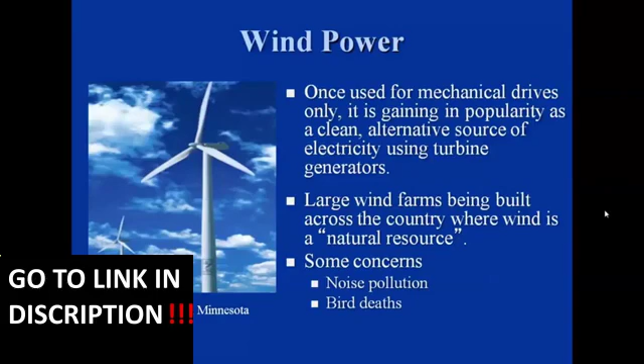Hydropower is basically using water force as energy. Traditionally, it had been used to churn mills. That's why we would have those water mills, and again, they did several things with those from a mechanical energy standpoint. But today we have hydroelectric generators.

We most predominantly have hydroelectric dams, but we also have what are known as tidal powered turbines. These are actually utilizing the current flows, generally in and out of a river or in and out of some type of inlet. They use these in the North Sea off of Scotland. There's an experimental one in the East River in New York City as well.

And again, there are subsurface turbines that actually spin as the current goes in one direction or another, and those drive a generator which produces the electricity.

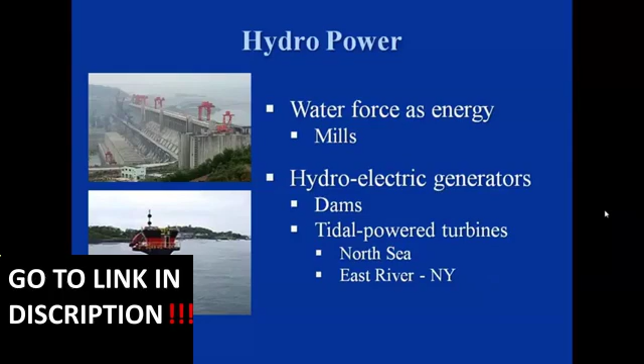Solar energy has been around for quite some time. The interest in it and the expansion of it really began with the oil embargo of 1973 and 1974, and then the second embargo in 1979 caused even more interest in it. The idea is to collect heat and energy from the sun and use it for things such as pure heating, generation of steam for electric turbines, or to actually create electricity directly, which would be the use of photovoltaic cells.

In a lot of cases, it's used to heat water, even for space heating. We generally have two types. The passive solar energy is using the direct heat of the sun. There are solar collectors, and they can direct the heat in a particular area. It's primarily used for space and water heating, and it can also be used to create steam.

So some of the panels you might see on office buildings or residences may be doing nothing more than circulating water through for hot water heating. Others, and you would probably recognize the difference, are the photovoltaic ones that are producing power. This brings us to the active part: it's the photovoltaic conversion of sunlight to electricity using semiconductive materials.

It's dependent on the atmospheric condition and the Earth's position relative to the sun. Off to the right there you see a photovoltaic array, small scale use here, but you see them more and more throughout. They're using them now for traffic signs, communication systems, for instance pipeline companies, or any type of long distance lines or cables or whatever else. Signals are transmitted and the power is coming from photovoltaic cells.

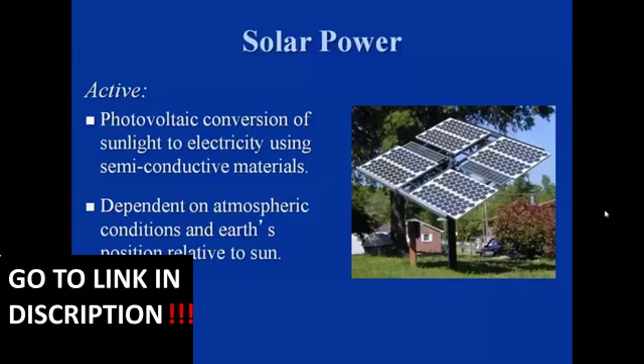Geothermal energy. We generally think of geothermal energy as natural steam coming from geysers and other places. In those cases it could be used for direct space heating, it can also be used directly for industrial processes, and steam will drive steam turbines at a power plant or on site where the geothermal steam is coming up.

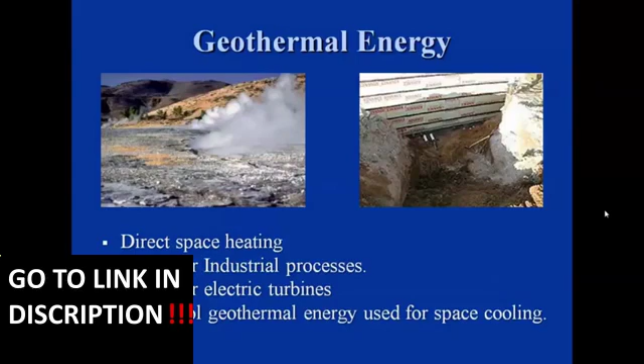But a flip side of that, which a lot of people are not necessarily aware of, is that you also have geothermal energy used for space cooling. After all, if you go several feet below the surface, the soil and temperatures down there are much cooler than above ground, so you can drill down into that cooler area and draw up cool air to use for space cooling. This is becoming more and more prevalent.

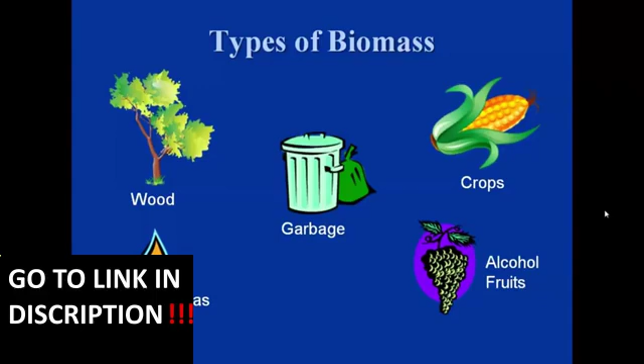Biomass, these are the various types when we talk about biomass and energy coming from biomass. We're talking about things like wood, garbage, crops, various alcohol fruits - in other words, fruits that can produce some type of alcohol that can be burned as energy - and landfill gas.

Biomass, one form here, is landfill gas. You have decaying trash in landfills, and it creates methane. All the biological material that breaks down and decays will end up giving off methane gas. Over time, older landfills will actually have pockets of methane within them. There are people who will go out and poke a hole down into the landfill to get those pockets of natural gas, and they'll use it on site mostly.

They can use it to drive some small turbines or small generators to create power on site. In some cases they may have a process whereby they need to create some steam, so they'll use the natural gas for that as well.

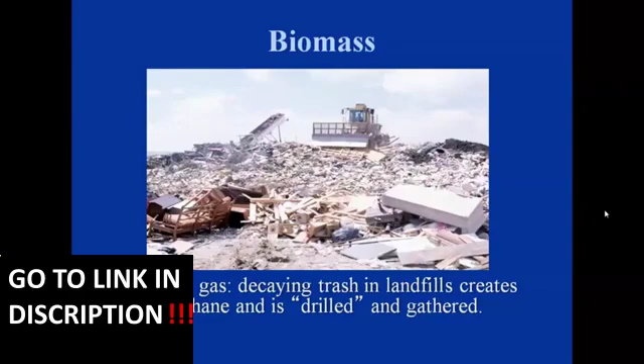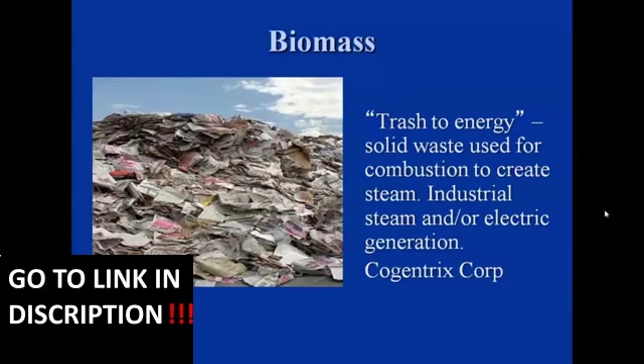Wood and wood waste - these are normally byproducts from large wood mills and paper mills. To be efficient and environmentally conscious, they'll use the wood waste, the wood pulp. They can burn it, and it becomes a heat source where they create their own steam, used in the process of making things like particle board or even paper. They can also use the heat source to run small generators on site for their own consumption and operations.

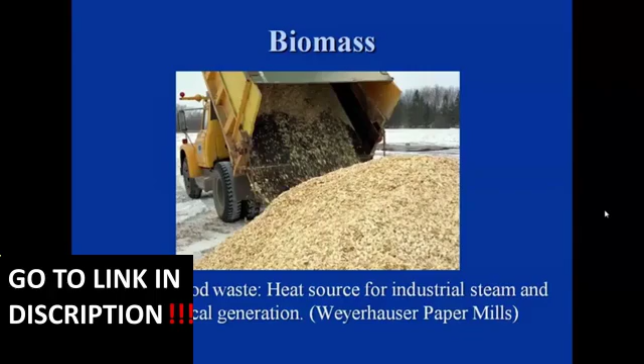The Weyerhaeuser Company, a huge manufacturer of various forms of lumber, wood, and particle board, does this on location with a couple of their very large facilities in southeast Oklahoma.

And on the biodiesel front, we could use vegetable oil, peanut oil, soybean oil, and recycled grease from restaurants. Once it's cleaned, you can...